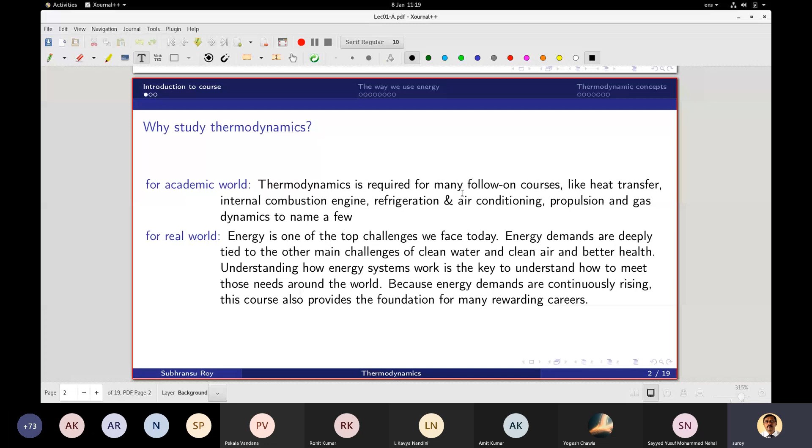Now you have to understand how energy systems work. Then only will you be able to meet these needs of clean water, clean air, and energy shortage around the world. Energy demands are continuously rising, so unless you learn to tackle them—for example, when I was a student here, we never had these solar collectors that you now have above the rooftops of many hostels. At that time we didn't have so much renewable energy, we didn't have cheap photovoltaic cells, where we transform energy from the sun to some other form. So to analyze these devices in a macroscopic manner, we need thermodynamics. Understanding of thermodynamics is very much necessary. That is why you must study thermodynamics well.

Now, in this course, we'll cover some basic concepts. We will study some devices where you are transforming energy from one form to another. We will learn the properties of the materials—liquids, fluids, or solids—which take part in the thermodynamic process. We will also understand the thermodynamic behavior of solids, liquids, and gases. We must understand the thermal and thermodynamic properties required to calculate the amount of energy conversion from one form to the other. Then we have to evaluate the amount of energy, work, and heat transfer process.

Now, all these are guided by some laws—the law of mass conservation, and the law of energy conservation, because energy is transformed from one type to another, but it is neither lost nor created.

Then we must learn the details of some applications. For example, there are many devices in a power plant. There is a boiler, which I'll talk about later in more detail, where steam is generated. There is a turbine where we extract work from the steam, and then finally we generate electricity.

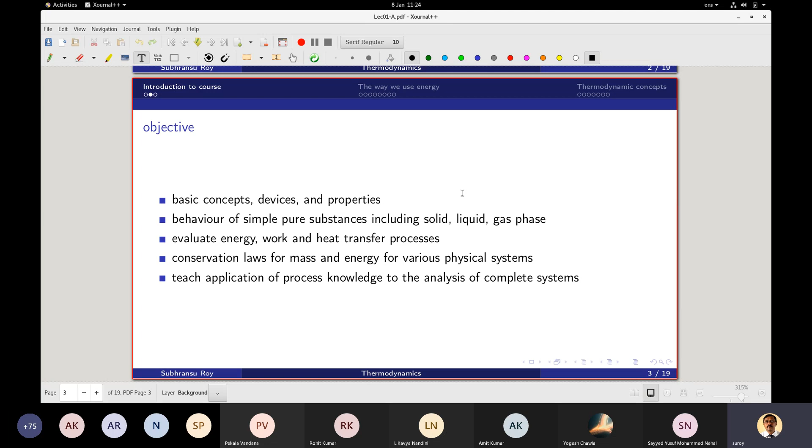You still have to understand design. You still have to understand stress analysis, the mechanics you have been taught about—how, if there is a force, things bend, how it fails—then fluid mechanics, many things are involved. But thermodynamics will give us, in a macroscopic sense, the ability to specify the equipment properly.

Then what is the outcome of this course? After you do the course, you'll be able to identify the different subsystems of a large thermodynamic system, because each of these subsystems have to be analyzed separately, and you will be able to follow the heat transfer path and the work transfer path. That is very important, because the actual subsystem is extremely complex. You must be able to simplify them, without losing the ability to capture the physics.

Then you have to note the temperature, the pressure, the density. Also, if you are given a particular substance, a fluid or a solid, and some of the properties like pressure and temperature are given, then you should be able to find out the other properties. You should be able to read the handbooks, or use some correlations to find out the other properties.

Because unless you get the full set of properties, you'll not be able to solve the problem. Then, given a physical setup, you should be able to formulate the associated reasonable approximation of work and heat transfer. Now, even if the work transfer may be extremely complex for you to capture every minute detail, in an overall sense, you should be able to get the bulk work and heat transfer.

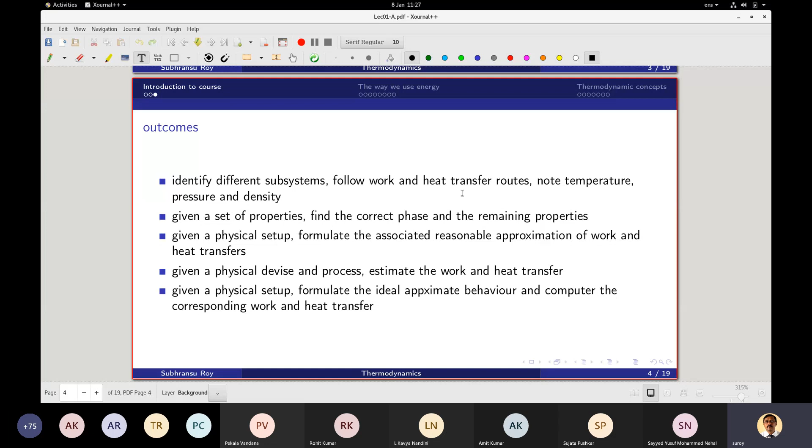Now let us, as I told you, since energy is so important in a global sense and also locally in India, here you will see all these energy studies that we are doing are to benefit mankind. So let us see how human resource is distributed throughout the world.

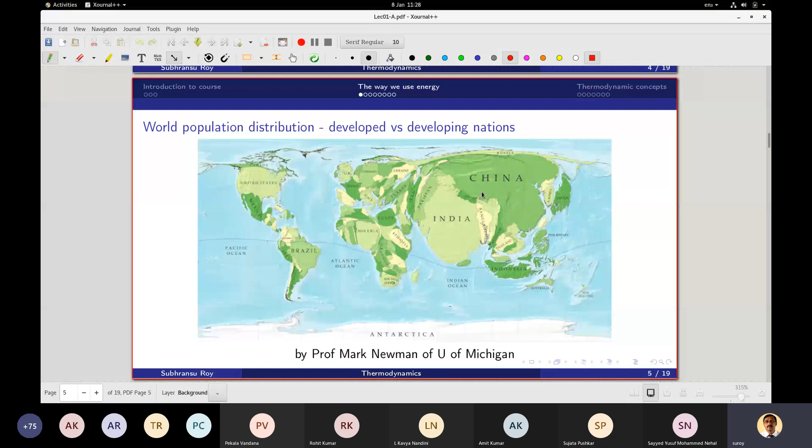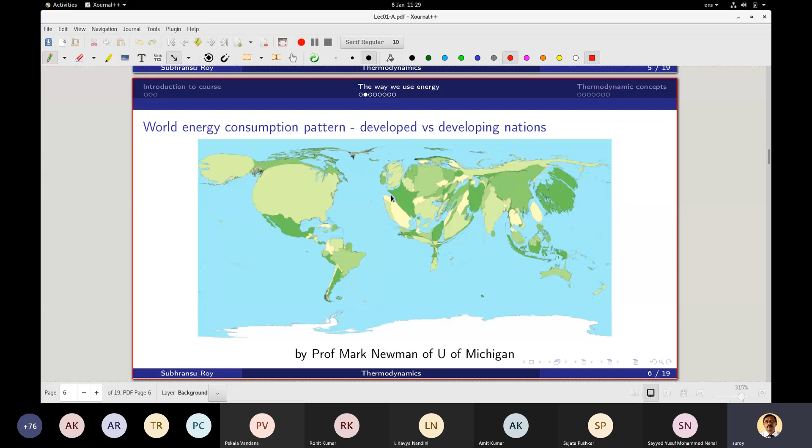And let us see the energy use in these countries throughout the world. Now here you see India has shrunk. China has also shrunk, not that much, of course, these days. But here you see USA and Canada are large. So these are the countries which have very little population, but they consume a lot of energy. And when you have lot of energy consumption, it has to do with emissions also, which pollute our environment. So this is how the developed and the developing nations have very different energy requirements.

Now another thing that you must understand is that now that we want to have clean air, low emissions, we are always concerned about carbon footprint. So low carbon means it does not produce so much of carbon dioxide and carbon monoxide, and so it gives us much more clean air. It's healthier.

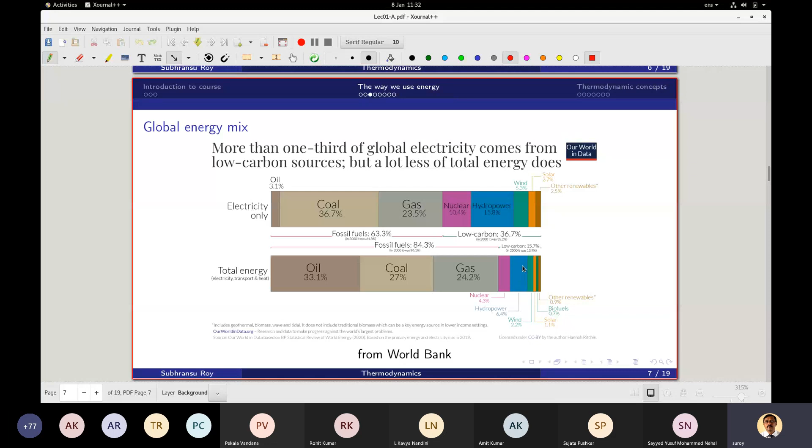We have improved over the years, but we still need to improve more, and we have to spend more time getting these low carbon energy sources popular. Now let us look at India.

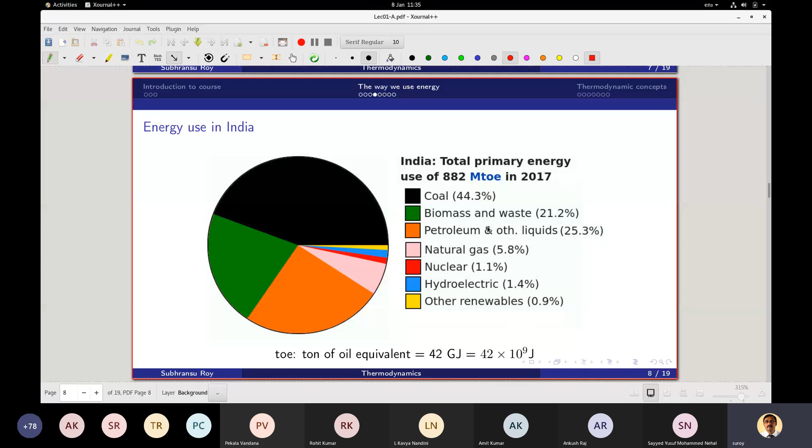Small hydro power plants, which the government is trying to introduce. Wherever you have a stream or some water source, you can use it.

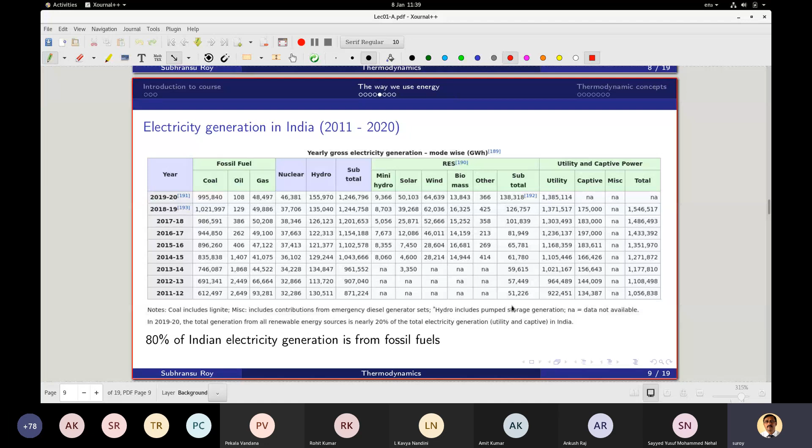Sometimes what we do is we pump the water at some times when we have spare electricity, right? Maybe through solar or some source, we pump the water and store it at some high place and then use it later on. That is also included here.

Now, that is why there is a thrust. You are always hearing that we are shifting to electric vehicles, right? We are shifting to electric vehicles. Why? Because we think it'll be less polluting and we don't have to use oil. Now let us look at the electric vehicle in a broader sense. How does it impact our environment, right?

Now electric vehicles, the battery that you have, that has to be charged. Now when you charge it, you have two sources. One is the thermal source, where you burn coal. We don't have much nuclear power plants. We can burn coal, or we can have a solar power plant or wind energy from where you can charge your battery. Now, if you use our conventional electric line where the power is coming from the thermal power stations, then...

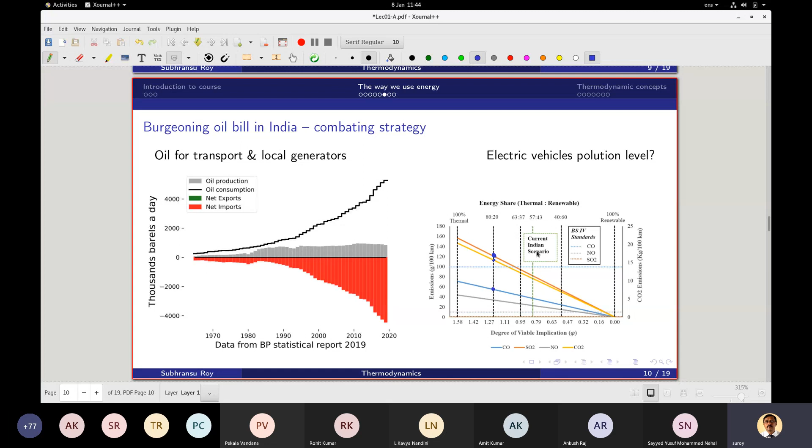So what India has done is, we had the Energy Conservation Act of 2001. This act requires large energy consumers to adhere to energy consumption norms. New buildings nowadays in India have to follow the energy conservation building code to meet energy performance standards. And for equipment, say if you want to buy a refrigerator or an air conditioner, you see labels like Energy Star 3, Energy Star 5.

So the Bureau of Energy Efficiency in India enforces that every power consuming device that you sell in the market, like a refrigerator or an air conditioner that consumes electric power, must have a label showing its efficiency. That efficiency, we will learn how to find out in thermodynamics class.

And we are talking about a low carbon economy or low fossil fuel economy, which is based on low carbon power sources, and they have less emissions, minimum greenhouse gas emissions. These are terms that you must understand. So when you go for an interview, it's very important that you understand these things, and you must learn how what we are studying in thermodynamics is going to help the country.

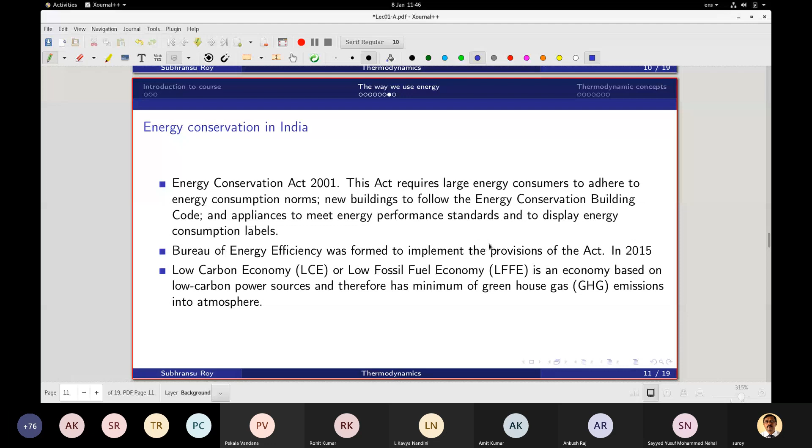Now in this course, you will see that there are some free books that you can use, and there are some other books also I will recommend. Also there are some calculators you will use, traditional charts for getting the properties of steam, carbon dioxide, ammonia, water, air, water vapor mixture. So here, these are websites where you can do that, and also there are some other calculators.

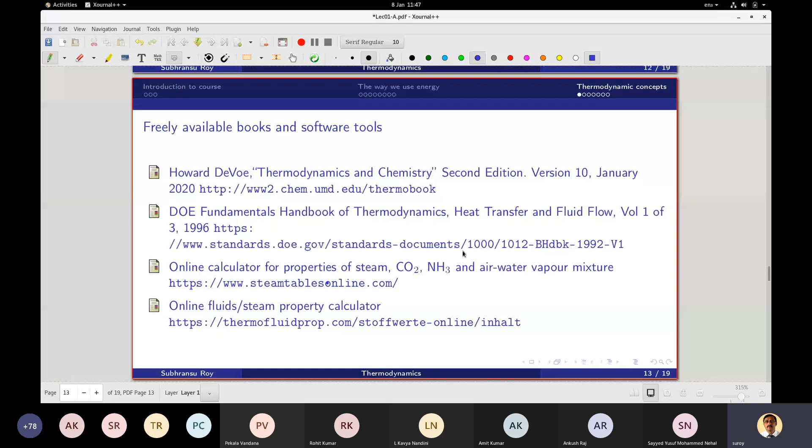So what will happen is, although you will have an understanding, we will show you charts about getting the properties of these different fluids, but you must also be able to interpolate. The values are not given everywhere in the tables, but sometimes for problems, you can also go to the website and get the properties.

Now, if you look up these standard textbooks, it tells us what is thermodynamics. According to these books, thermodynamics is concerned with the ways energy is stored within a body or system, and how energy transforms from one type to another, including those which involve heat flow, work done on or by the system. So you must understand what is a system, and be able to calculate the work done on or by the system, involving heat flow.

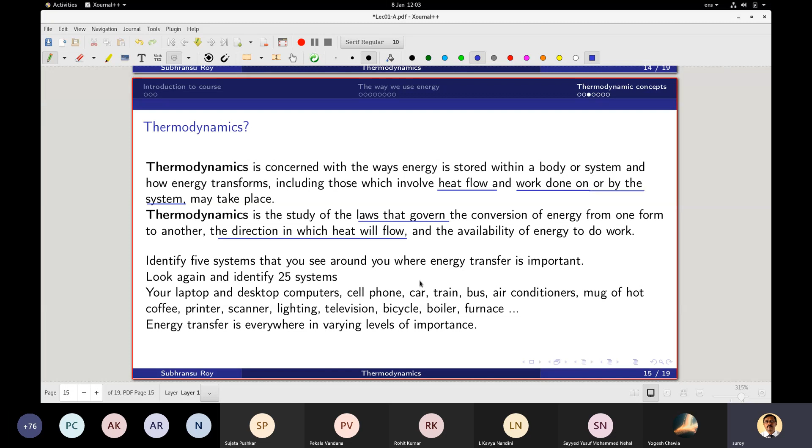But it will give us a macroscopic view of it. Say, for example, with this thermodynamic analysis, I will not be able to tell the distribution of temperature in the chip. I'll only be able to tell that to maintain some average temperature of the chip, what is the heat input, what is the heat output. So bulk analysis is possible using thermodynamics.

So these are the different units of pressure that we will use. 1 atmosphere is 101.325 kilopascal, and this equals so many bar. Of course, in India we don't use pound force per square feet, but in other countries they use it. And Pascal is the very familiar unit.

In India, at least in the academic world, everywhere we have shifted to SI units. But in the commercial world, different sectors use different terminologies. Say, for example, in the oil industry, they will use 1 million tons of oil equivalent as an energy, or barrel of oil - that energy of 1 barrel of oil. So also kilocalories is a very well-known unit which is still being used, and of course joules, which are the SI units.

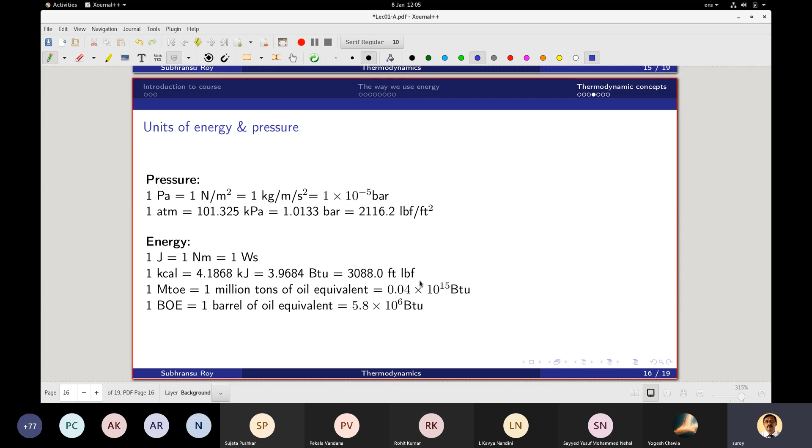So these are some of the important units. Now temperature is also a very important concept in thermodynamics. We have centigrade, Kelvin, Fahrenheit, Rankine. Centigrade and Kelvin are very popular, and 1 degree change in temperature in centigrade is equal to 1 degree change in temperature in Kelvin. The change is the same, but the absolute values are a little bit different.

Say 0.01 degree centigrade is 273.16 Kelvin, or 0 degree centigrade is 273.15 Kelvin. So this concept of temperature comes from thermodynamics. We will talk about it more later on when we go through all the laws.

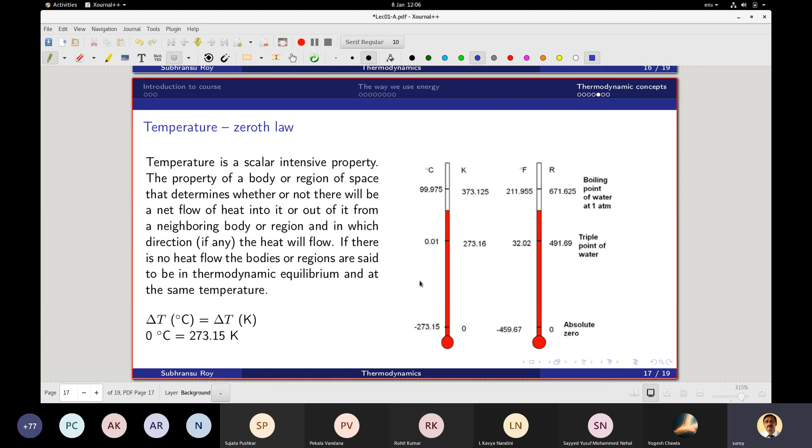Excuse me sir, this part is clear, what is transfer of heat, but can you explain what is transfer of work? I'll tell you. So what is this transfer of work? Now, say I have a piston.

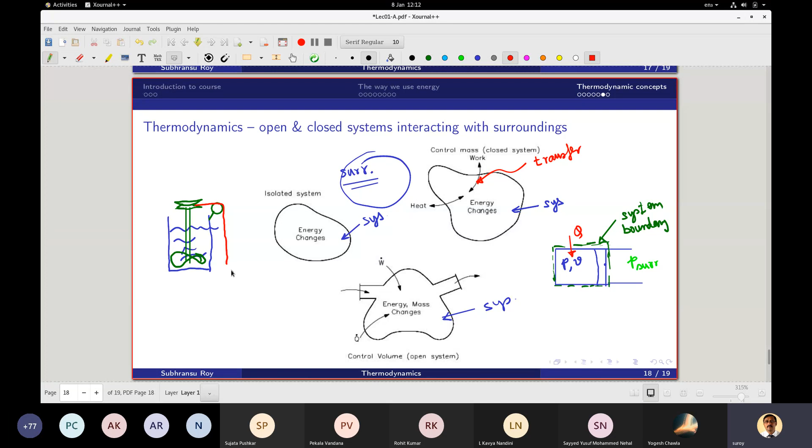So here I have some liquid. So I'm doing an experiment. I have water here, in a bucket, and whose temperature I can see because I put a thermometer. This is an idealized experiment.

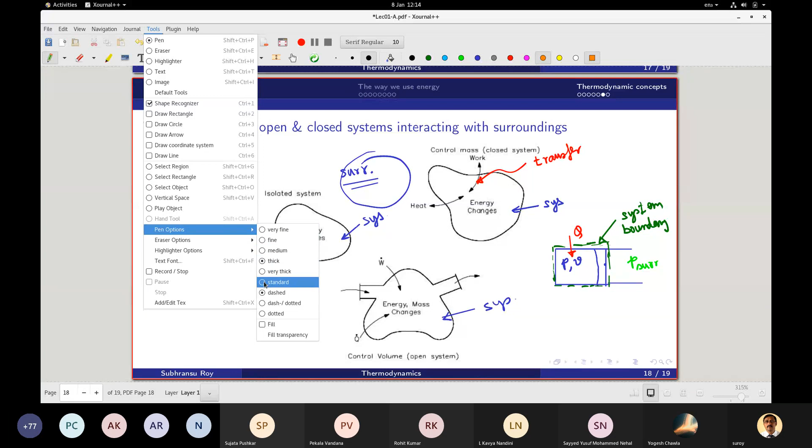So then there is transfer of work from outside. So this is outside - I will have to define my surroundings, otherwise I cannot do anything. So say this is my surrounding. So this is my system boundary. So the work is being transferred between the surrounding and the system.

If work was not transferred, then how will the water get heated up? When you stir, lot of energy you're putting in water against some force, some torque. So through the shaft, work is being transferred. So this is also another way of transferring work through a shaft.

And here work is being transferred because against some pressure, the volume is expanding. This is one type of work transfer. This is another type of work transfer. In both cases, you are having work transfer. And here that work that you are transferring is being converted to heat. The temperature of the water will rise if the stirring is strong enough, and if I insulate the beaker, the temperature will rise slightly. So here work is being transferred and converted to another form of energy.

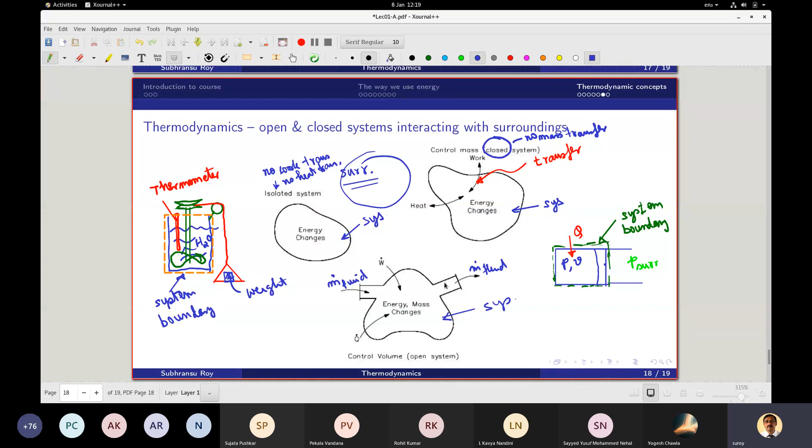Only work and heat transfer can take place, but no mass transfer. What about this? Here some fluid is coming in, M dot fluid, and again going out, M dot fluid. So mass is coming in and going out, and you also have work transfer and heat transfer. So this is an open system.

Sometimes it's very important to have a boundary. This concept of boundary, you must know. It is not always true that the boundary has to be fixed. The boundary could be a fixed boundary or a flexible boundary.

So what is a flexible boundary? For example, this could be a flexible boundary. This system boundary is at the edge of the piston. As the piston moves, this boundary changes, right? The boundary means up to the piston end. So as the piston moves, the boundary changes, so it's a flexible boundary. But in this case, it's a fixed boundary. So you can have a fixed boundary or a flexible boundary.

So the first thing, when you do a thermodynamic problem, you must identify your system, your surrounding, and the boundary. Only then can you formulate the problem properly. You will see that unless you define your boundary in a certain way, it's very difficult to calculate the transfer of energy. So you have to judiciously place your boundary so that you can easily calculate the amount of energy transfer. That is very, very important.

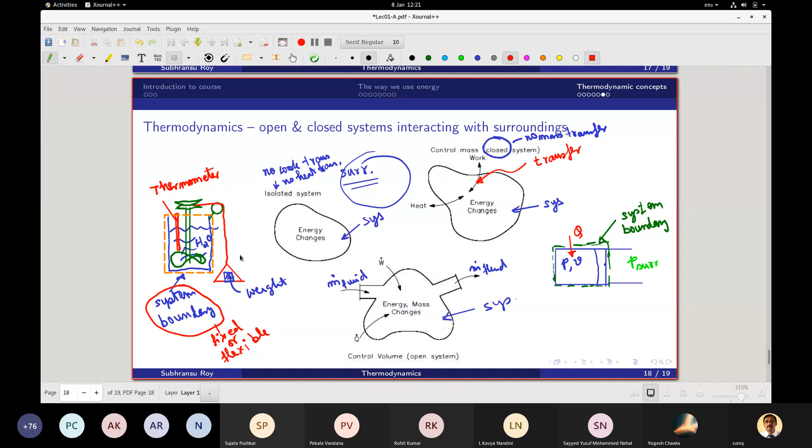Okay, now let us look at this. After some time I will go into more detail, like in the book form. Now let us look at this.

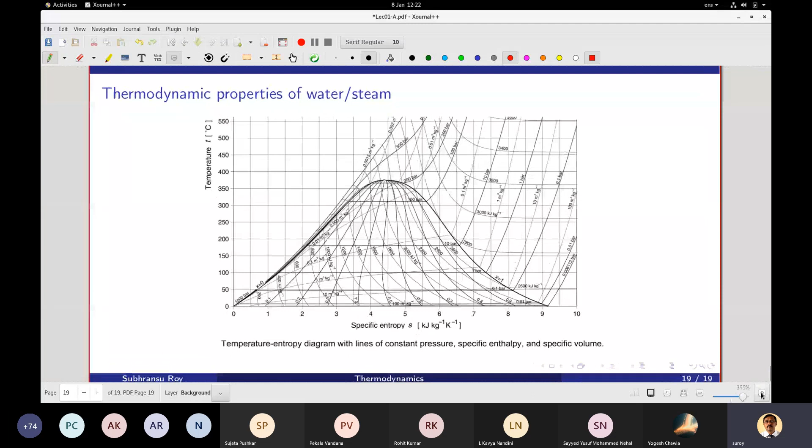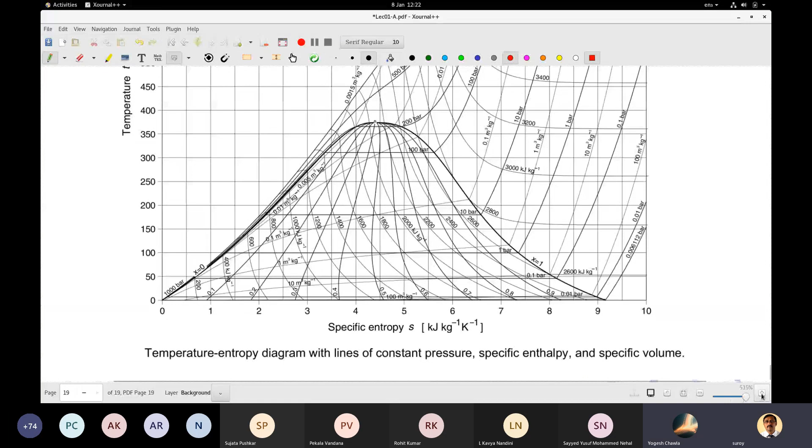Are you able to read this? Hello, are you all able to read this? No sir, it's really not clear. Sir, we can zoom in. Okay, let me zoom in a little bit. Are you able to read it now? Is it fine? Yes sir, now it's better. Okay, let me do it a little bit more.

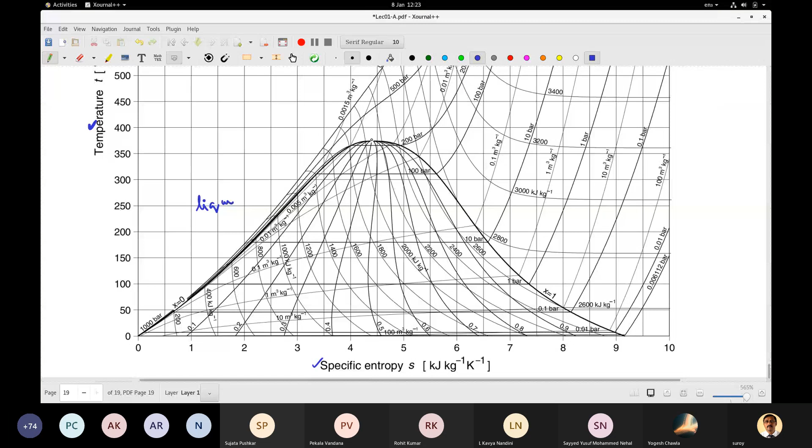So here we have temperature, and here is some property, let's say some specific entropy. We will talk about the different properties. This diagram is for water and steam. Here you have liquid, and here you have vapor. In between you have liquid plus vapor coexisting. So this is actually for water, H2O.

So you can see 10 bar, 100 bar, 1 bar, 0.1 bar - these are constant pressure lines. So if I follow a constant pressure line, say 1 bar, which is atmospheric pressure, I will go from here.

Right? And then I will go across this 1 bar.

Just a minute, just a minute. I have a phone call. Hello.

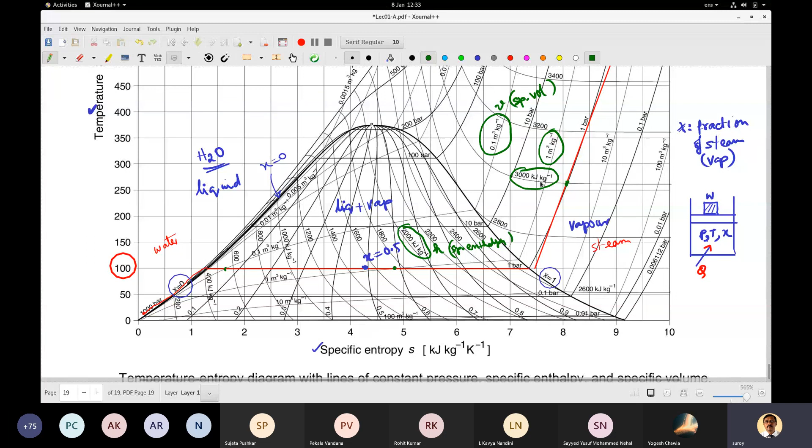We have to learn how to get different properties when pressure and temperature and X are given. As the state of this H2O changes, the properties are also changing. This is the enthalpy, and it is increasing. These are the constant enthalpy lines. So if you know the temperature and the enthalpy for a particular state, you can find out the specific volume.

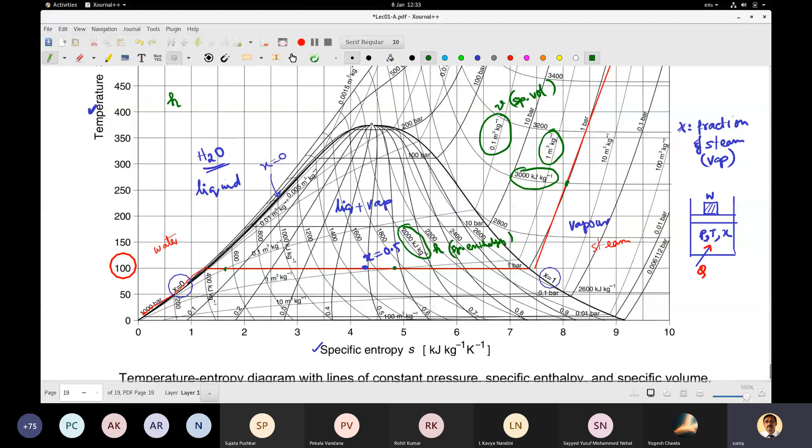So basically what we are having here is H as a function of pressure, temperature, X, everything. Also specific volume as a function of pressure, temperature, X. Unless you are able to read these property values from some handbook, book, or software, you will not be able to do the problems. These are not the only properties, there are others also, like entropy, which is a function of pressure.

You can also look at it another way: pressure as a function of temperature and S. You can also say pressure as a function of entropy and temperature, or volume as a function of entropy and temperature, and X also as a function of entropy and temperature.

So these are all interlinked. As I told you initially, given some one or two properties, you should be able to get all the other properties. So getting the property is also very important, to be able to evaluate the property.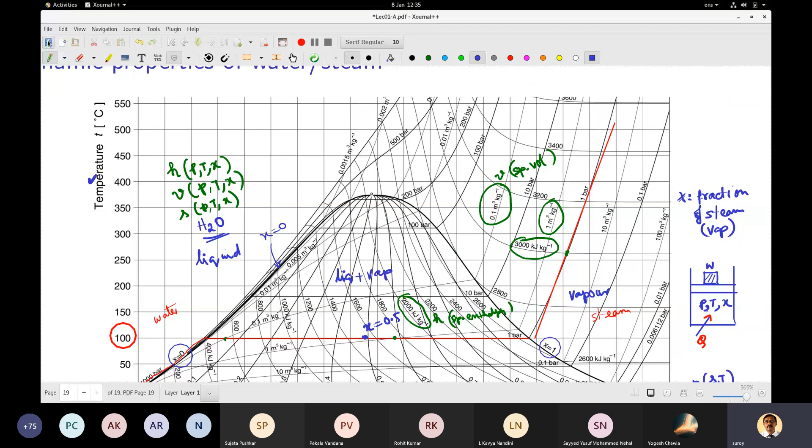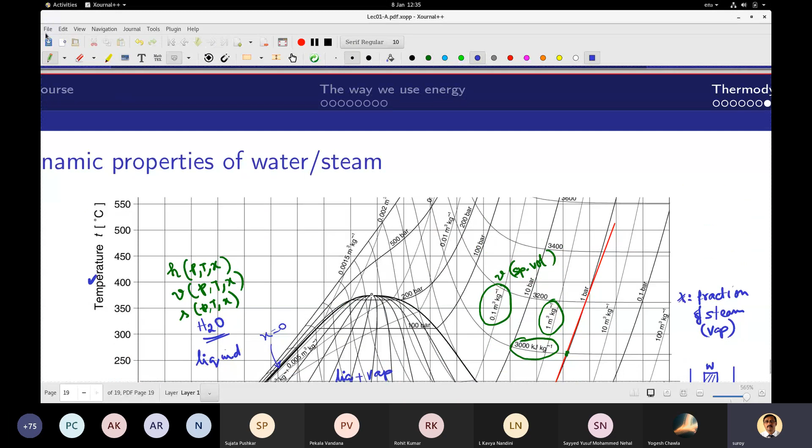So what I do is I save it, and then I will now write and then teach, because I have not made those slides yet. So I will just read from this.

Are you able to see this screen? This thing, are you able to see the ruled page? Yes sir, you are able to see. Yes, I can sir. I can write here on this. Right, I will write on this.

So now we have some idea, I've given you an overview of why thermodynamics is important, why converting energy from one form to another is important, why we have to have a choice of energy source. We have to come up with new devices where, instead of using fossil fuel, we should have sun rays as the energy source. We have to come up with new thermodynamic systems and devices, and in the job field also, people with such expertise are needed. Otherwise everything we have to import from China and Europe, that's the way we are doing it. We have to do it ourselves also someday.

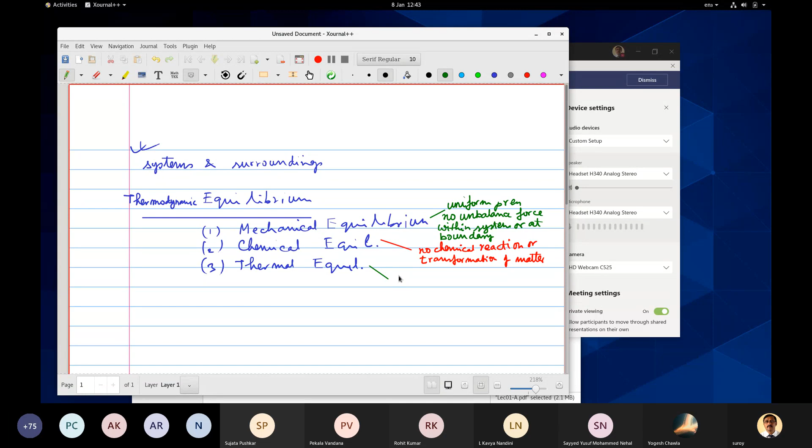And then you have the thermal equilibrium: no transfer of heat. If you say this body is in thermal equilibrium with the environment, that means they are not having any heat transfer between the system and the surrounding, and maybe their temperatures are the same if these two bodies are in contact. If a body is in contact with the surrounding, then I will say it is in thermal equilibrium, and also it means within the system also.

Within the system, these concepts of thermodynamic equilibrium are very much necessary.

Now we will talk about the process. While thermodynamic equilibrium is fine, ultimately, left to itself, a system will attain thermodynamic equilibrium with its surroundings, finally, if it is just left to itself and nothing is done on it.

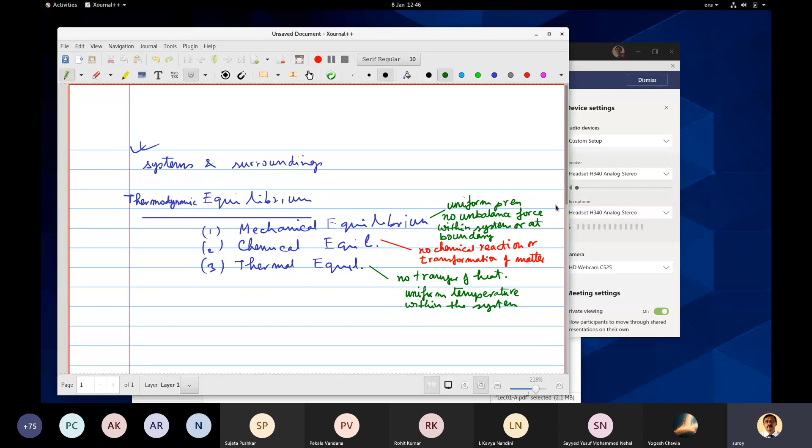Now this is an idealization, because it takes time to attain equilibrium, so this will be a slow process. But this is how we will think of it.

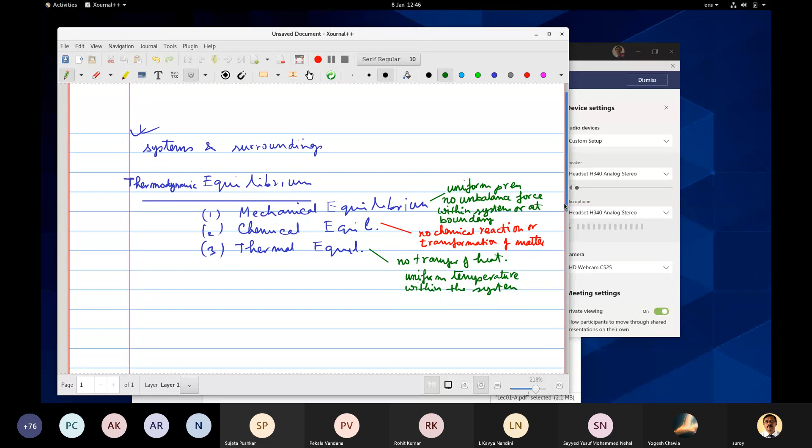Say, for example, okay, so we will have, many times we will use this word, quasi-static process. Quasi-static process means, say, it goes to some states, say some P1, P2, some V1, V2.

So here it goes from here to here. So here it is, say, P1, V1, and T1, some values. Then it goes to P2, T2, V2. This is state 2.

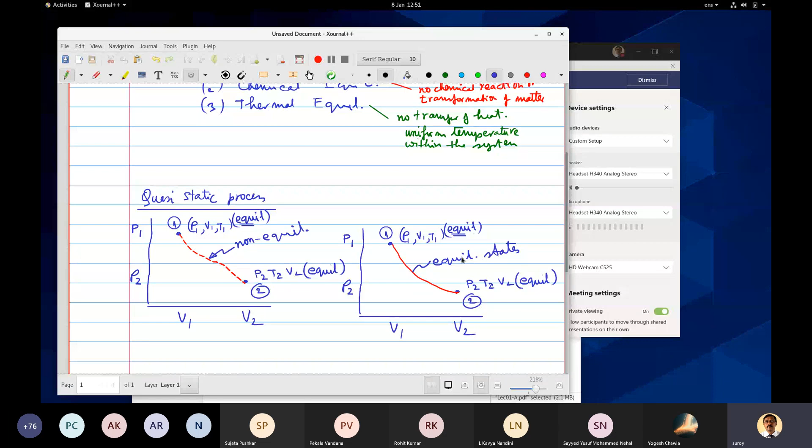This is one. We can also have it another way, for example, where it goes to several equilibrium states. So this is our quasi-static process.

So this will be our quasi-static process, where we are going through equilibrium states, and this is going from one to another where these are not well defined. So we have this quasi-static process concept, where it goes through all these small steps, it attains equilibrium every time. And I have already told you what is meant by equilibrium.

So this is a quasi-static process, and it's a very slow process. It's going through different equilibrium states. Say, for example, I'll give an example.

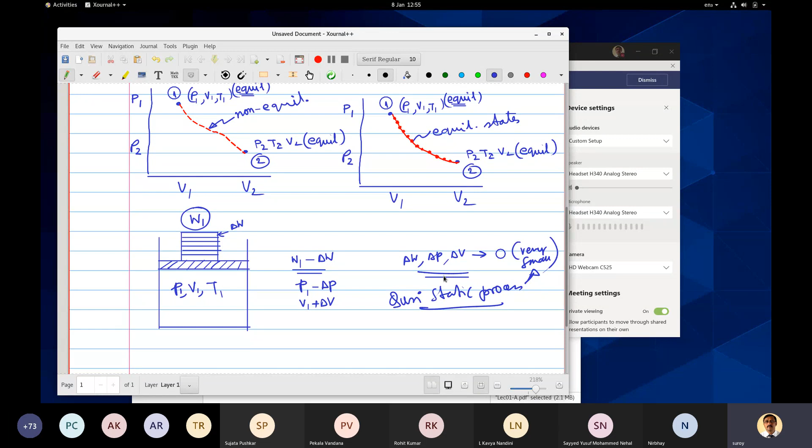Very small changes. So it will go slowly, because it takes time to get to equilibrium. This is theory, this is how we do the thermodynamics, but in real cases you cannot achieve it. But for our theoretical analysis, many times we will assume it to be quasi-static.